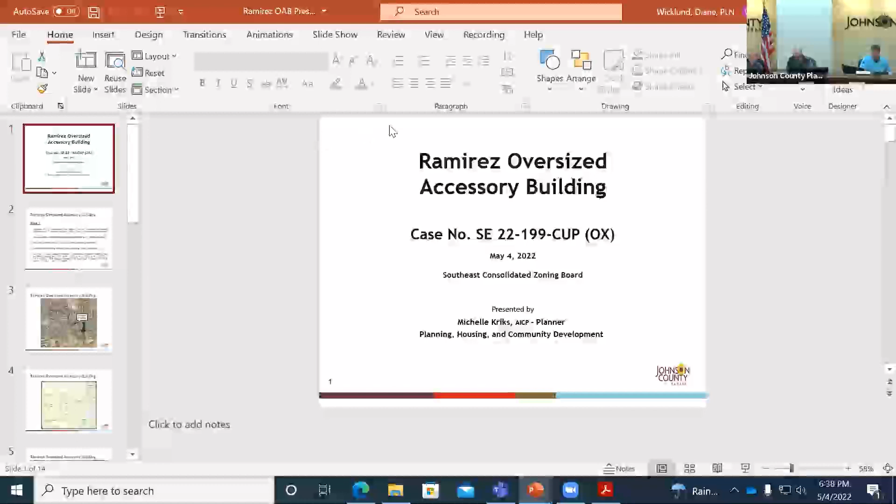Thank you, Mr. Chairman, members of the zoning board. Michelle Kriks with Johnson County Planning. This is case number SE-22199 CUP, a request for a conditional use permit for a 1,728 square foot oversized accessory building on 1.77 acres, zoned residential neighborhood 1, located at 14946 West 156th Circle.

Current improvements on the subject property include a single family home and a 120 square foot accessory building. With the existing 120 square foot accessory building plus the proposed 1,728 square foot building, the total cumulative accessory building area on the property would be 1,848 square feet.

Per Article 18, Section 6 of the Johnson County Subdivision Regulations, when lots are greater than 1 acre, the size of an accessory building increases from a base size of 900 square feet by 300 square feet for each full acre of property. When fractional lot areas are present, such as in this case, the size of the accessory building is determined on a pro-rated basis. For the 1.77 acre subject property, the maximum accessory building size permitted by right would be 1,131 square feet. This request exceeds the maximum accessory building size by 717 square feet, or about 63%.

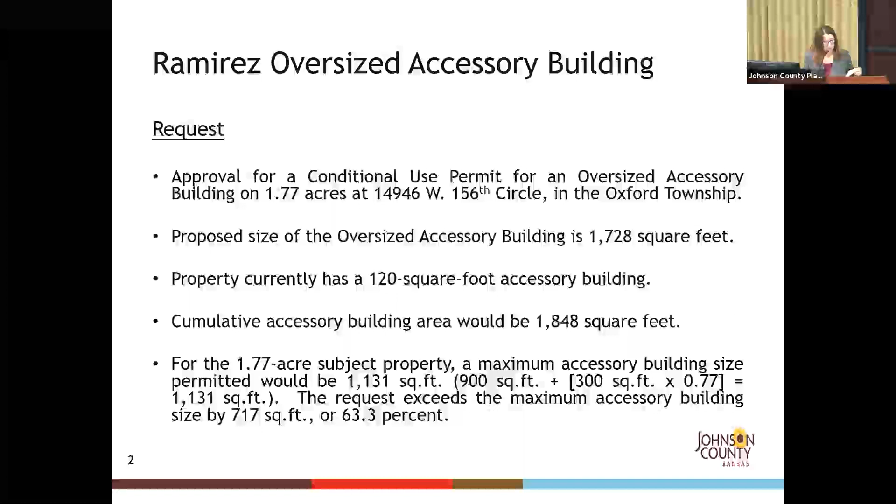On the slide in front of you is highlighting the subject property. To the north is the main arterial of 151st Street, to the south is 159th, and just west is Blackbob Road. You can see the property there. The city boundary of Olathe is just around that area as it weaves in and out of different properties.

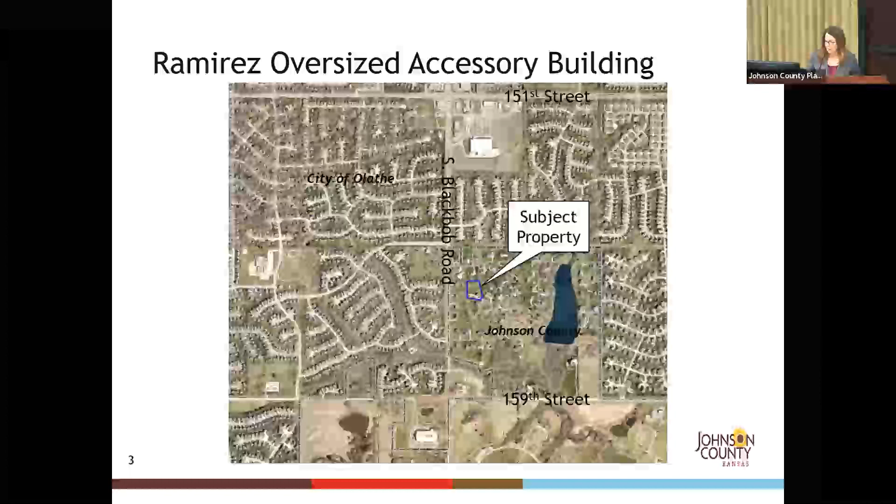Here's the local regional zoning, with the subject property highlighted in blue. Most of the properties within that neighborhood are zoned residential neighborhood 1. Within the city there's single family residential, and then there's a little pocket of rural district to the south.

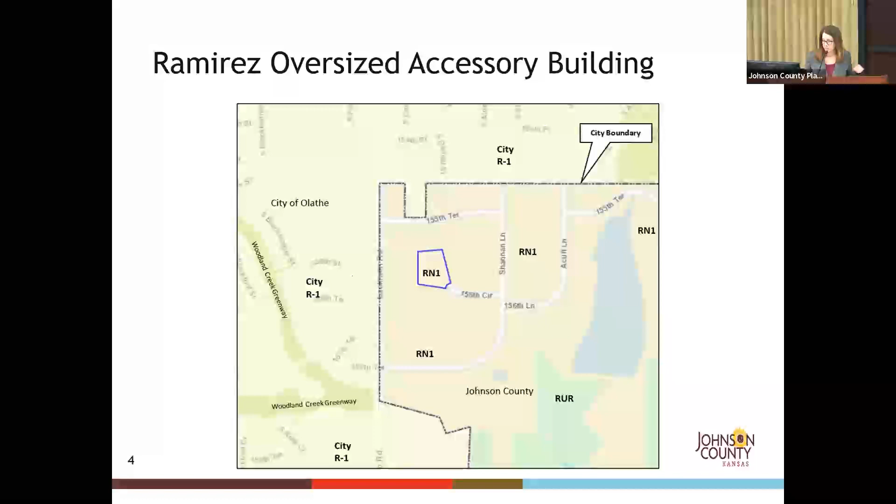Here is an aerial of the subject property, again outlined in blue at the very end of the cul-de-sac. You can see where the driveway comes in off of 156th Circle, and there's a large existing concrete pad off to the south and southwest of the home. That pad site is the proposed location of the accessory building.

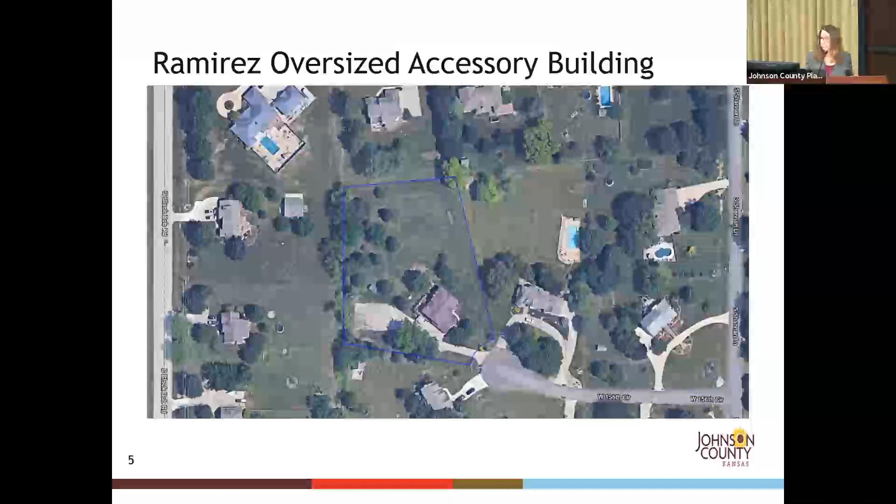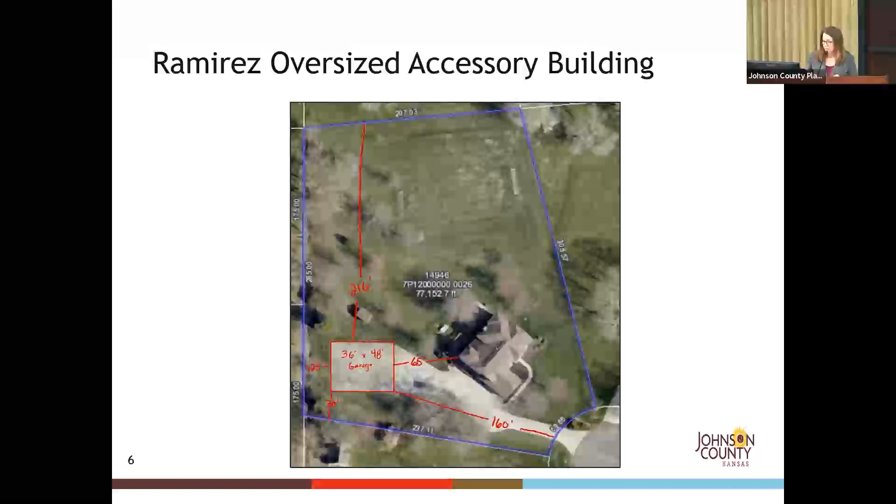This is in the staff report, but here is the site plan. You can see the size of the garage, proposed to be 30 feet from the south property line, 25 feet from the west property line, and 160 feet from the right of way. The proposed building would comply with all setbacks in the RN1 zoning district.

The proposed accessory building would be 16.9 feet tall with an area of 1,728 square feet. The structure would be constructed of manufactured wood siding with smart trim and asphalt shingles, painted to match the home with a Sherwin-Williams retreat color.

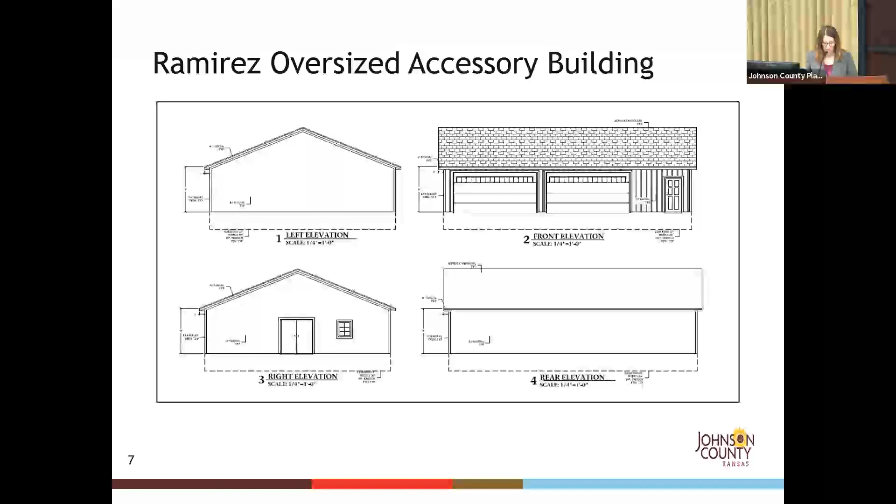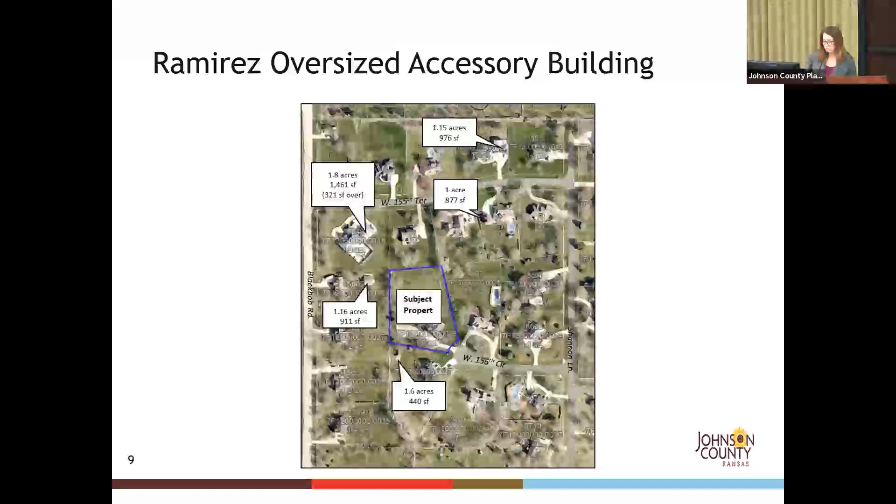Here is an aerial view again of the subject property from a different angle. You can see along the south and west property line there is a tree line of a mix of deciduous and evergreen trees. That tree line would provide some natural screening from Black Bob and the neighboring property to the south.

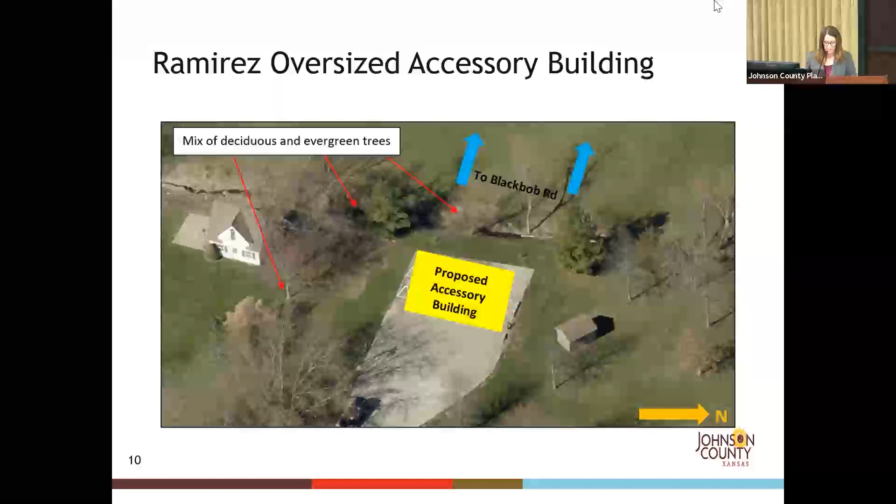Over the weekend, planning staff received a comment from Kamala Landshut regarding the project. This email has been placed on the dais for the zoning board and will be made part of the public record. Because we have a zoning board member attending via Zoom, I'm going to read it so he can hear the nature of the email and have the same information to make his consideration.

Quote: Hello, I am writing regarding the Southeast Zoning Board meeting on May 4th regarding the application filed by Leslie and Greg Ramirez. I am not able to attend the meeting as I am still at work at that time. Here is my statement, which I would appreciate being read into the record. Tim and Kamala Landshut, who reside at 14903 West 156 Circle, live in the same cul-de-sac as Greg and Leslie Ramirez. We have no concerns regarding the accessory building being completed on their property. Thank you, Kamala Landshut. No other comments were received by planning staff regarding this item.

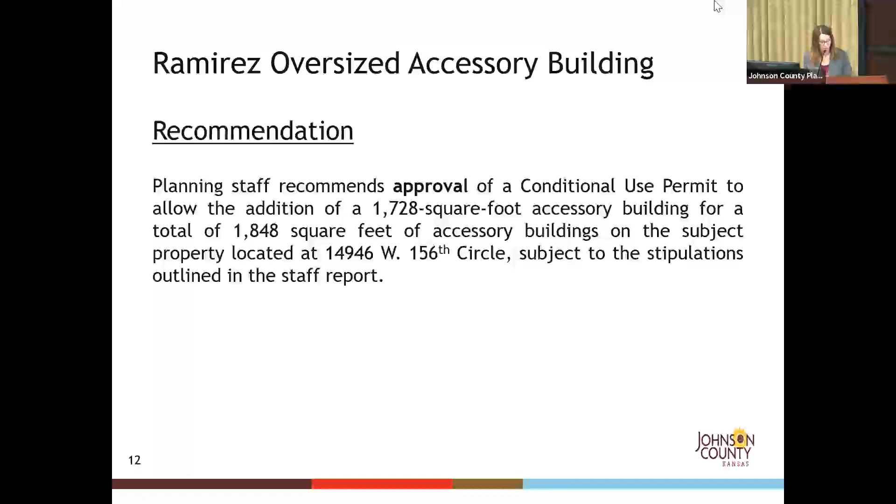Planning staff recommends approval of a conditional use permit to allow the addition of a 1,728 square foot accessory building for a total of 1,848 square feet of accessory buildings on the subject property located at 14946 West 156th Circle, subject to the stipulations outlined in the staff report. Here is a list of those recommended stipulations, and here is a recommended motion. With that, I'm available for questions.

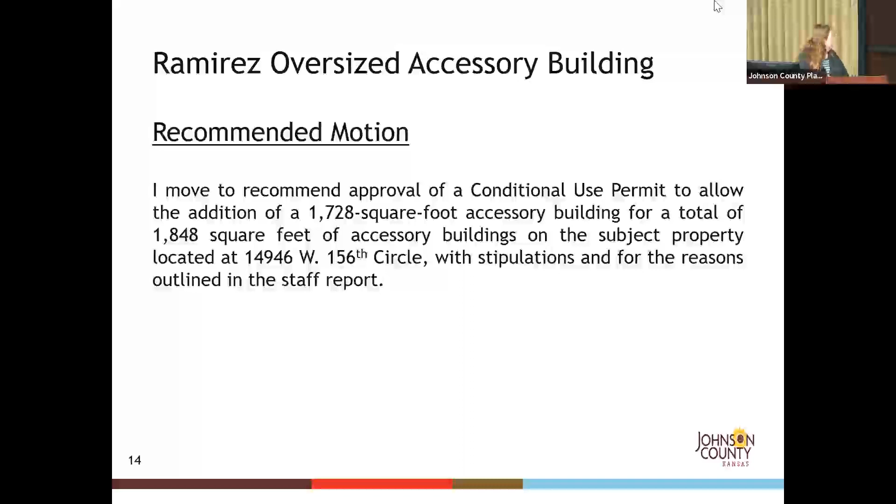Any public comments regarding this case? No, I'm not seeing any public comments. Any further questions from the board? I just want to comment, Michelle, I think you did an excellent job putting the documents together and answering all the questions proactively, so I appreciate that.

Thank you. Okay, I'm going to close the public comment section. So, discussion of the application from the board. That was my comment. I would just say I support this. They've done a nice application, Michelle did a good job presenting it, and it seems in line with what else is going on in the neighborhood.

We have a motion. Emily Coleman: I move to recommend approval of a conditional use permit to allow the addition of a 1,728 square foot accessory building for a total of 1,848 square feet of accessory buildings on the subject property located at 14946 West 156th Circle, with stipulations and for the reasons outlined in the staff report.

Before I second that, I just have a quick comment. The presentation had the application number as SE 22, but this says 21, so I'm not sure which one is correct. I just want to make sure technically which it is. Michelle Kriks, Johnson County Planning: Yes, it should be SE 22. I apologize for the typographical error.

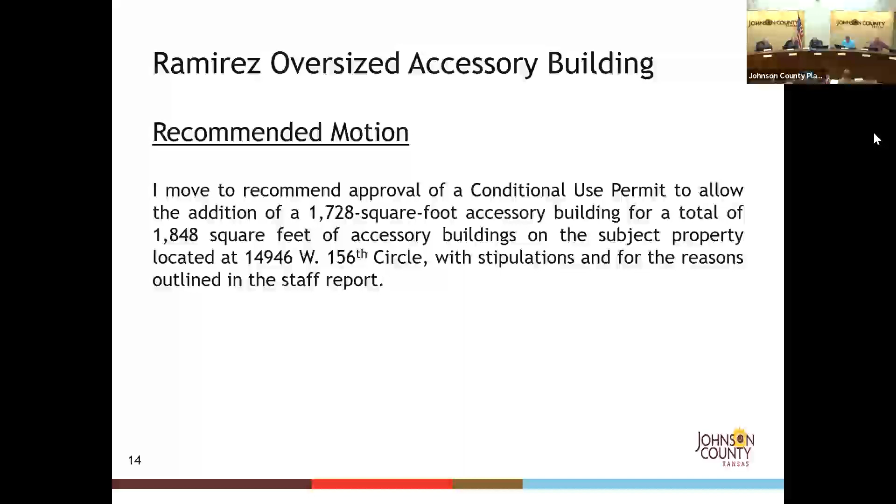Okay, thank you. So that's going to be recommended by the zoning board up to the county commissioners. This item will be presented to the June 9th Board of County Commissioners meeting, starting at 9:30 a.m. here at the County Administration Building, 111 South Cherry Street, 3rd floor board hearing room, Olathe, Kansas. All right, fantastic. Thank you, Michelle.

Okay, we're going to move on to the second item this evening. Thank you, folks, by the way, for coming and participating. We're going to move on to the second item, application number SE 22-201, PDP FDP preliminary and final development plan, 7225 West 207th Street, Woody Palmer, applicant and landowner. Is the applicant here? Yes. Okay, perfect. Thank you for coming.

Okay, so, oh, there's Diane over there already. All right. Thanks, Diane. Go ahead. Thank you. Diane McClellan, Planning Department. I would like to enter the staff report dated April 27th, 2022 into the record. Just a quick note, I am covering this application for Michelle Leiniger, who wrote the staff report.

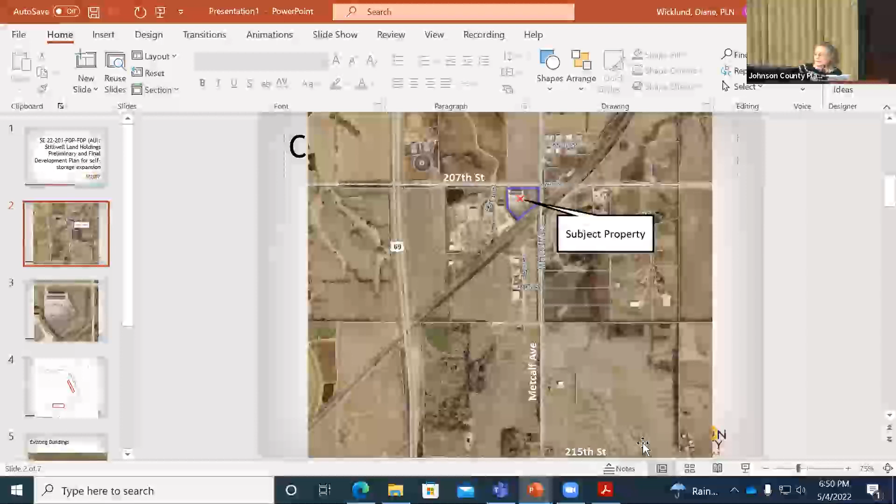This is an application for a revised preliminary and final development plan for an addition of 2 new self-storage buildings on the property. The applicant is Woody Palmer, and he's here in the audience. The property is located at 7225 West 207th Street, which is 207th and Metcalf Avenue. As you can see here on the screen, that's kind of a zoomed out view. And this is kind of a more zoomed in view showing the subject property. You can see there's 2 existing buildings there. So that's the property.

So the applicant is proposing to add 2 additional self-storage units to the existing site, which is developed with 2 storage buildings currently and outdoor exterior storage. The new units are proposed on the east side of the site along a screening berm and on the south side of the site near the back of the property. There are no changes to the exterior storage area that's proposed. So the south building will be 5,280 square feet in size, and the east building will be 3,000 square feet in size.

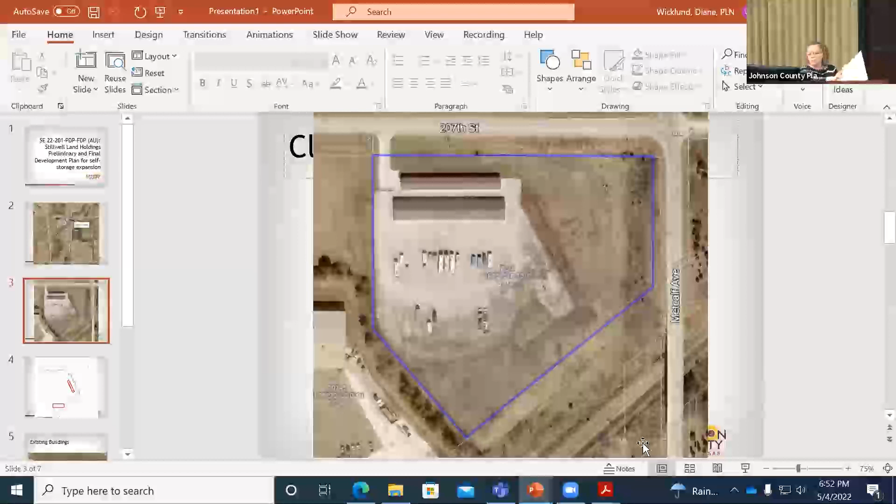So here's a copy of the final development plan. The 2 red squares are the location of the 2 new proposed storage buildings. And then here is a picture of the existing storage buildings, and so these new proposed buildings will match and just look like these existing buildings. The subject property also has an existing conditional use permit for outdoor storage that was approved in 2018. The 2 new proposed buildings were not included in the original approved plan, which is the reason for the revised preliminary development plan along with the final development plan for the 2 new buildings.

So just kind of a quick review of the Golden criteria. Our Golden analysis is the changes to the approved preliminary development plan and in the current final development plan are consistent with the PEC 3 industrial zoning that the property has and the nearby similar industrial uses. The character of the area is both industrial and agricultural in nature. The proposed PDP and FDP are for an expansion to this existing use, which was developed about 4 years ago. The use for self-storage facility remains compatible with the character of the neighborhood.

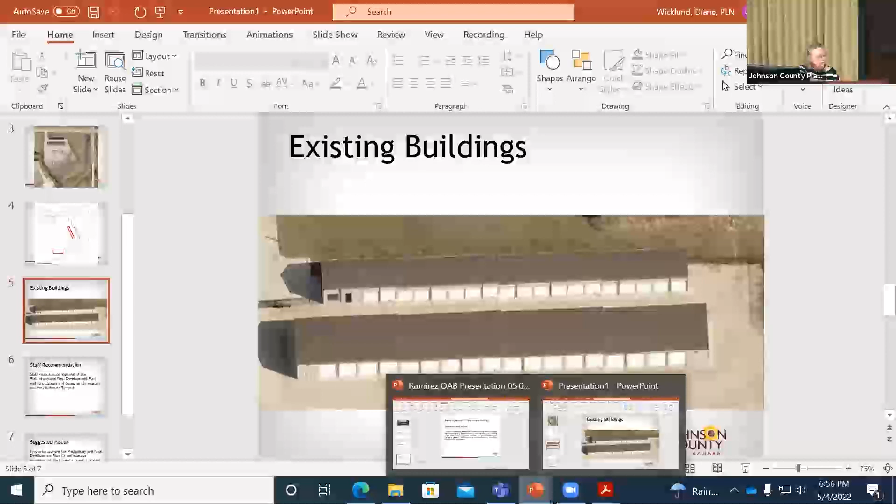Therefore, planning staff is recommending approval of the revised preliminary and final development plans with stipulations. Those stipulations you can see on page 7 and 8 of the staff report. And here is a suggested motion also.

If the board, for the board's reference. And I think with that, I'll stop and take any questions. Okay, thank you Diane. Any questions for staff from the board?

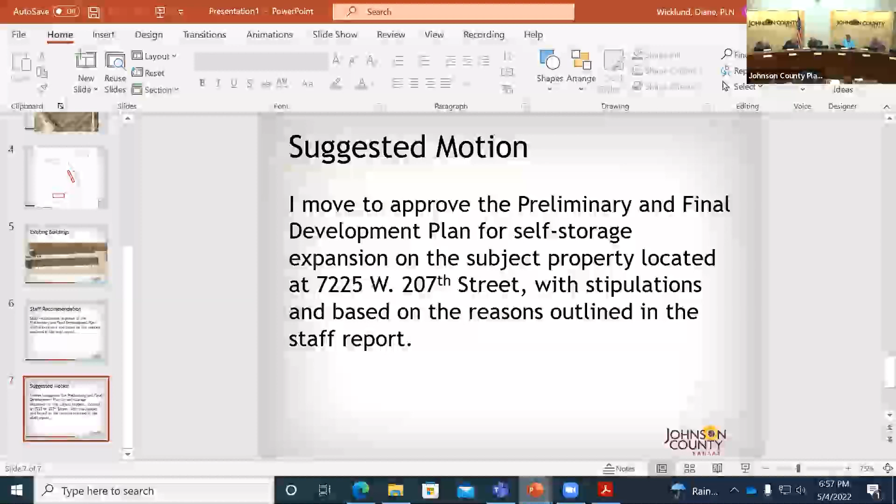Ken Klingensmith: Can you go back to slide 4? The two buildings are those in red, correct? That's correct. If you can see my hand, there's two existing buildings here and here where the crosshairs are, and the two new buildings are where the red squares are.

That's correct. Will the red building to the east facing Metcalf have the same front design as the building facing 207th Street? This might be an applicant question. I believe so. Oh, okay.

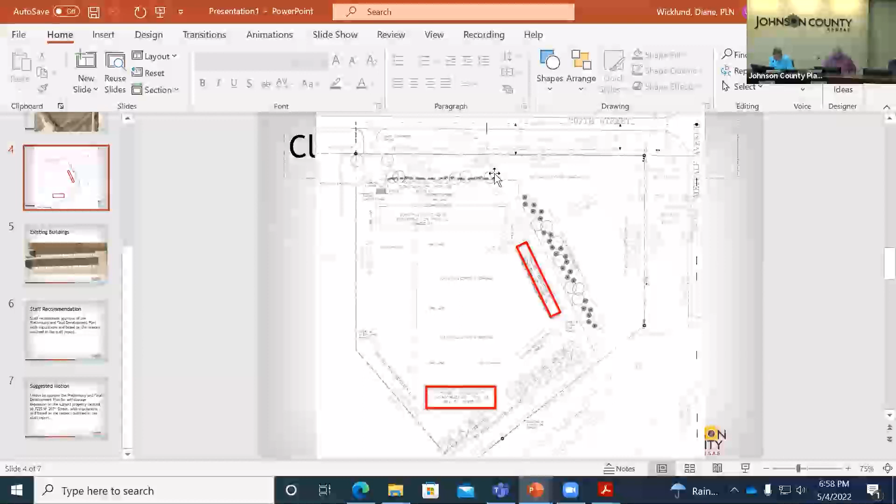Any other questions for Diane, for staff? No, but I did want to comment, Ken Klingensmith again. I appreciate on page 7 the exterior lighting - I actually pulled up the Stillwell lighting guidelines and it's consistent, so I appreciate the attention to that. Thanks, Ken. Okay, thanks, Diane.

Okay, applicants, would you guys like to come up and speak for a couple minutes? I don't have anything to add. Okay, let's go ahead and come up and give your name and address, and we'll see if anybody's got any questions and get you on the record here.

I'm Woody Palmer, representing the property at 7225 West 207th Street. Thank you. Any questions for the applicant? No questions, just a comment - I've been by the property many times and I appreciate how well organized it is. It's clean, it's well done. So appreciate that. Thank you.

I would second that. I would agree as well. It's good from above. Thanks, Mr. Palmer.

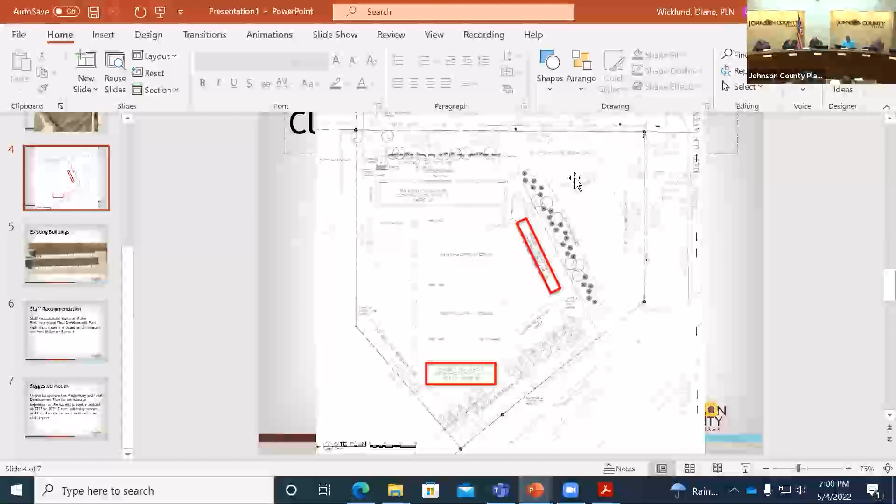Okay, public comments on this case. Anybody like to speak? Nobody on the Zoom? Okay, we don't have any public comments, so last chance for questions - board, questions of the applicant or staff?

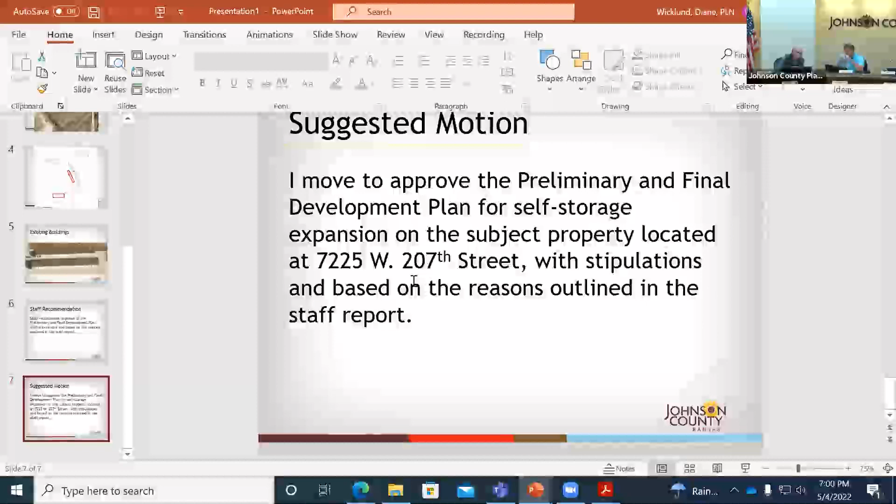The landscaping that's outlined on - second to the last page of the packet - is that all required landscaping? Looking at the elevation - it's the second to the last page of the architectural plans in the staff packet.

He's looking at the set of plans, the architectural plans - it's existing already, so it's part of the existing development. Yeah, I believe so - with the conditional use permit and the final development plan, my understanding is that landscaping, screening, and berming was required at that point, and I believe that's all been installed and existing now, and that is also sufficient and meets the screening requirements for these two new buildings.

Okay? That adequate answer for you, Fred? Yes, thank you, Mr. Chairman. Thanks, Diane.

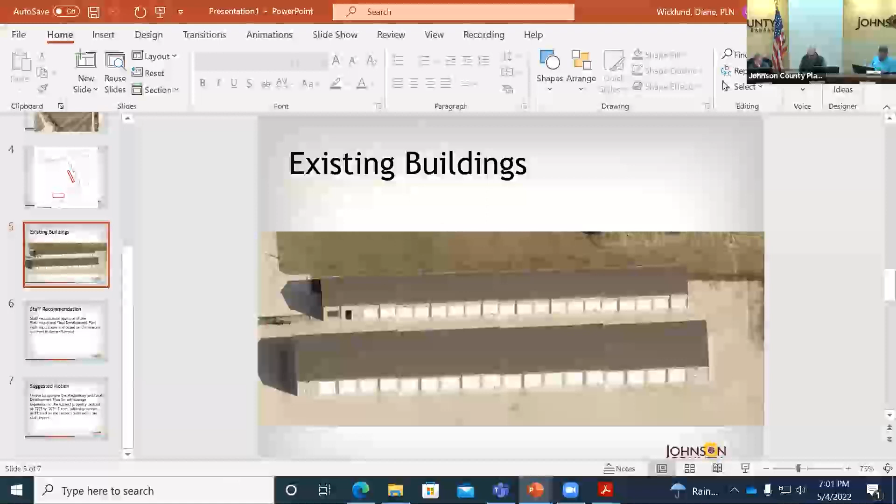Any other questions from the board for staff or the applicant? Okay, we're gonna close the public comment section. Discussion among the board.

Fred Weingert: I think it's consistent with the historical use of the property. I think the plan was well thought out. Appreciate staff's work and the applicant's work on this. Thank you, Fred.

I agree with him because it's good use for that property since it's right there next to railroad tracks, and can't use it for much of anything else, so.

Thank you, Dennis. I got a motion. Mr. Chairman, I move to approve the preliminary and final development plan for a self-storage expansion on the subject property located at 7225 West 207th Street, with stipulations and based on the reasons outlined in the staff report. Ken Klingensmith, I second. We have a motion and a second. Let's proceed with the roll call vote.

Aye. Emily Coleman, aye. Dennis Boland, aye. Kenneth Klingensmith, aye. John Lloyd, aye. Dan Foyle, aye.

Okay, thank you, that recommendation passes, going to be sent on up to the Board of County Commissioners - when? This will go to the Board of County Commissioners on June 9th at 9:30 a.m., here in this building, 111 South Cherry, 3rd floor. All right, thank you, Diane. All right, thank you, folks.